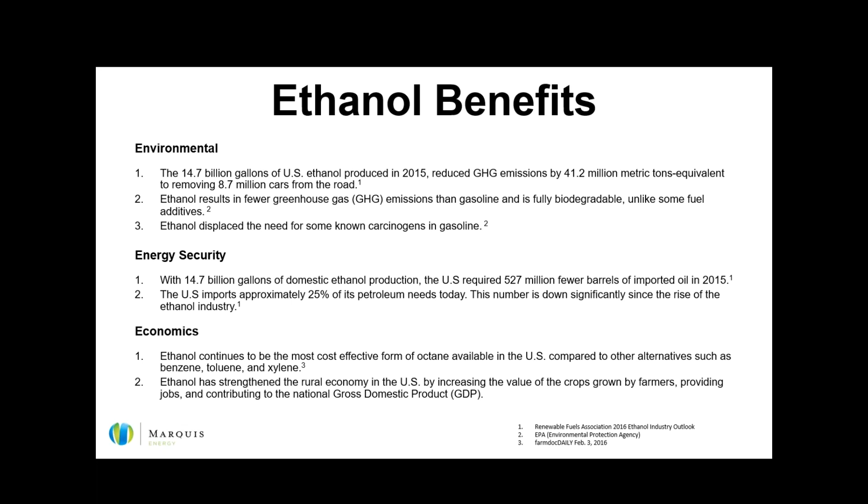You look at some of the opportunities in export markets and growing world demand. Right now we use about 10% ethanol in the United States. Brazil uses about 65%, and the rest of the world uses less than 2% in their fuel supply. We think there's good opportunity for growth there. It's a great story for the Midwest, for the ag economy, but also for our country and our world as a whole.

I mentioned that we had laid out a planned expansion back in 2006 to kind of double the size of our site.

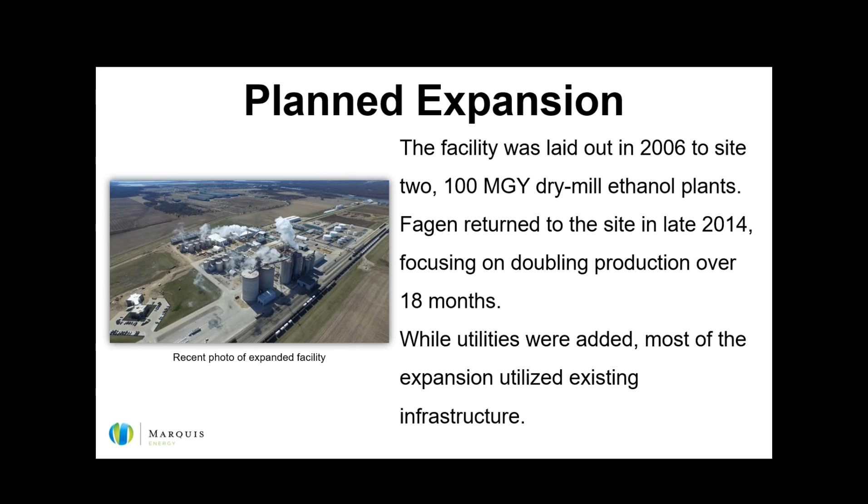Between our original facility that started production in April of 2008 and late 2014 when we brought Fagen in to work on the second south unit, we had increased production here at our original facility to over 155 million gallons per year. Currently both facilities are running well over nameplate capacity, and that's in large part due to our culture of continuous improvement, but I would also say our opportunity to reinvest into our facility.

A little bit about how we got to the decision to look at PCS7. When we were built originally in 2006 and 2007, we had installed a Siemens APACS DCS. By and large, I'd say we were very happy with the performance of that relative to some of the other systems utilized within the industry sector and the ethanol space. But I think as we considered that it was headed for legacy status, now was kind of a logical time, as we worked on this expansion, to upgrade our original DCS system - it really started to make sense.

There are a few pros and cons for the APACS system, but overall we thought the system was good. We enjoyed the functionality of the system - it had been very reliable for us. But I think we didn't want to get to a point where we had one system running on something new and modern and the latest and greatest, and a separate unit, located 150 yards apart, that was on a more dated system.

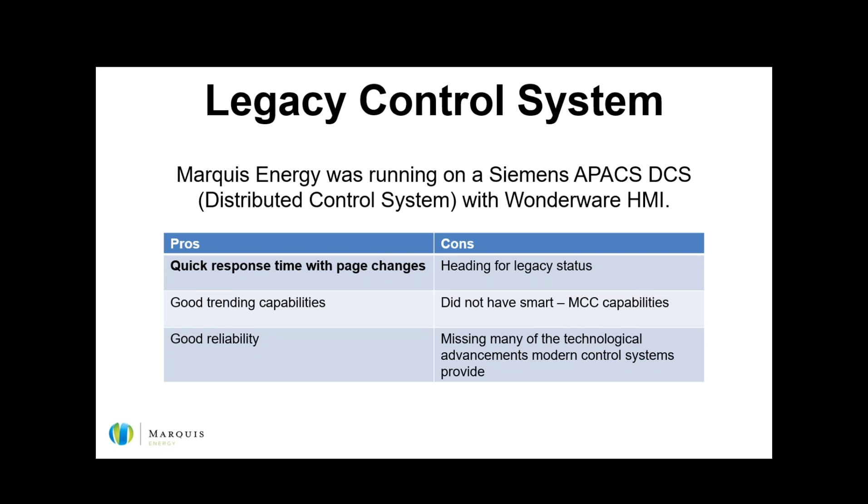So we decided to go forward with reviewing different systems we could utilize. I'll mention just a few of them - the Emerson Delta V was something we gave a lot of consideration to, Rockwell's got a system, and we considered implementing APACS over on our new build and new construction. I think we kind of wanted to get away from that - it didn't seem to make a lot of sense to implement new construction with an outdated system, or a system headed for legacy status at least. So the alternative for Siemens was PCS7.

Again, I think it came down to the decision of, do we have one plant running APACS and 150 yards away we're running Siemens PCS7? I don't think we thought that made sense. We felt like if there's ever a time to make the change, it's probably now. So Fagen got mobilized back out here in October of '14, and we made the change to our DCS on the existing North unit in August of 2015. Our operations team was able to get comfortable at a facility that was already operating, that we understood well, and it really helped our transition when we started up the South unit, having been running PCS7 on the North unit for a few months.

I mentioned we went with PCS7. We felt like the biggest driver there was the familiarity with the players. Our rep there, David Meyer at Siemens, represented us really well. We felt like he was a good communicator, and despite the fact that Siemens is a big company, we felt like we had good communication, and David got us access to the right people. So I think that was a big part of it.

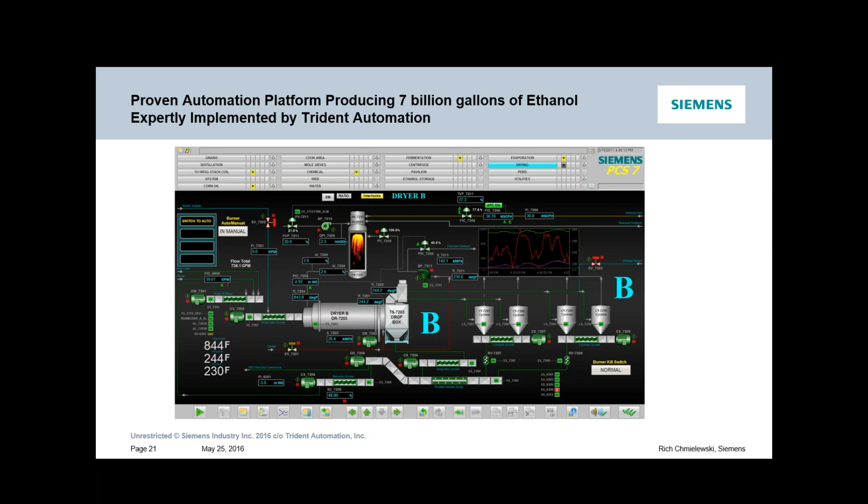We're going to continue through and talk about the benefits of Trident. Trident Automation is an independent professional services company specializing in process control technology solutions that deliver increased productivity, high reliability, and measurable cost savings. It's a big deal in the industry to be able to provide the services we do, and hopefully most of our customers are working with us because they want to, not because they have to.

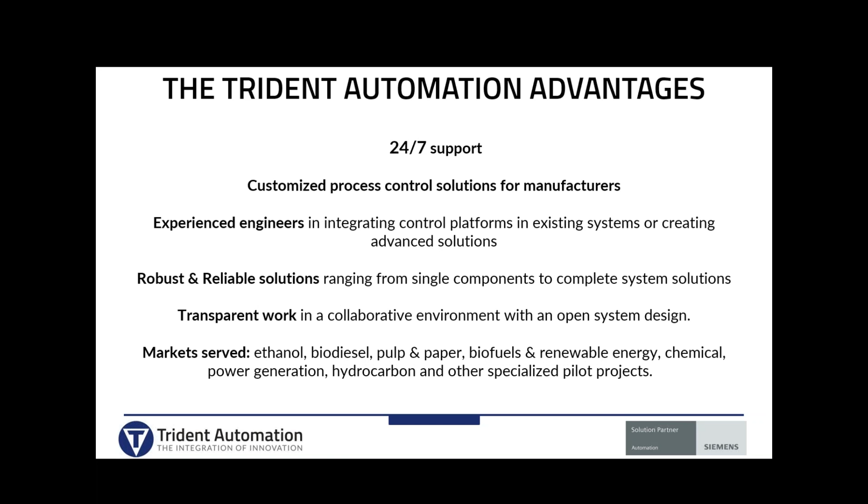So as far as the other experience, we offer a full range of products for ethanol, ranging from products like CivPac, which we developed in 2008 to better help with the control of the molecular sieves. We have a lab system that we put in 2009, followed by KPI, a key performance indication system, which was developed in 2011.

After that, we developed a Workbench suite, which allowed you to have a graphical web-based user interface to the lab, KPI, and DCS information at your desktop, as well as remote devices like tablets and cell phones, if you had VPN access.

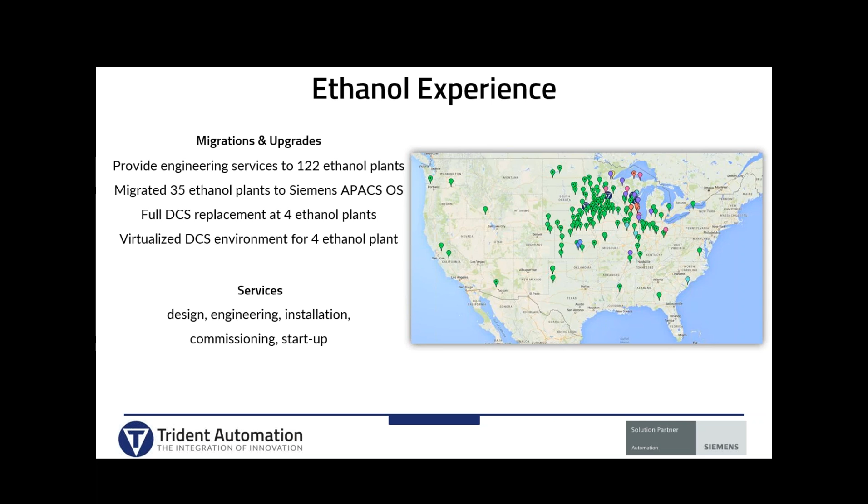So we were very excited to have Marquis Energy approach Trident and invite us to bid. We felt like we could provide a great solution for them. Like Jason had mentioned earlier, we've been working with them since their inception, and we're very excited to get into this and offer them some solutions.

So the following slides will basically go through and explain what we presented to Marquis and what options we offered in the quoting and the solution/results page, to end up there.

So as with any job, there's definitely requirements, and Jason alluded to some of those earlier. We had some time constraint issues right up front. They wanted to have this accomplished in their standard turnaround, which we felt we could meet. This isn't our first rip and replace. We've been doing this for quite a long time, and we have a pretty good track record of being able to meet the customer's timelines.

We did work with our customers' needs. We had the requirement of a virtualized system in there. Secure access to the DCS was a big plus for them, and there were some improvements we wanted to make around the other interfaces they had, to either Rockwell or ABB, any foreign device interfaces. It was important to the customers that we use standards, like the APL standard, Advanced Process Library.

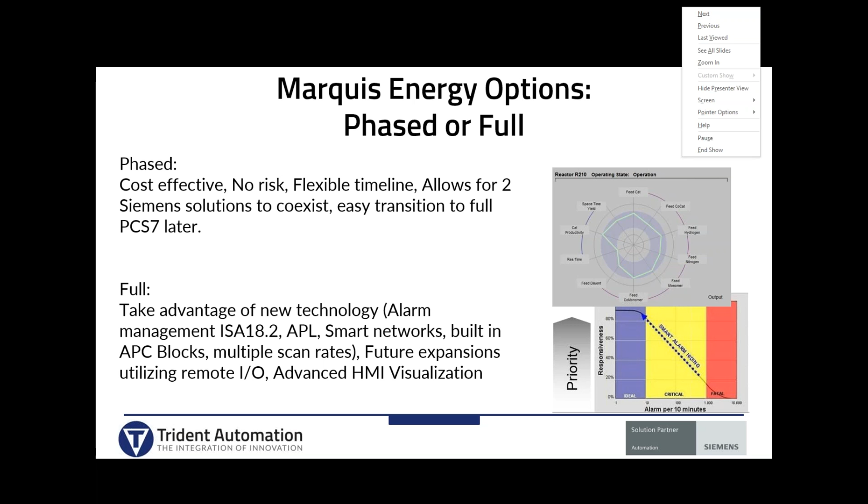Some of the challenges you have here are legacy PCs, where you have just old technology. Anything revolving around Microsoft PCs, they tend to flip those out so fast that your DCS seems to fall behind a lot quicker than it used to in the past, which leads to your legacy operating systems. In the case of Marquis, we were kind of stuck at Windows 2003 server, partially because the IO server, and because that's what the platform ran on.

Another drawback they had with the Wonderware is it's a third-party HMI, which means it needs an IO server to talk to it, so it doesn't natively talk to the control system. You have to have a little device in the middle there. I already mentioned this one, the no support past Windows 2003. And the biggest one, I think, is the security concerns.

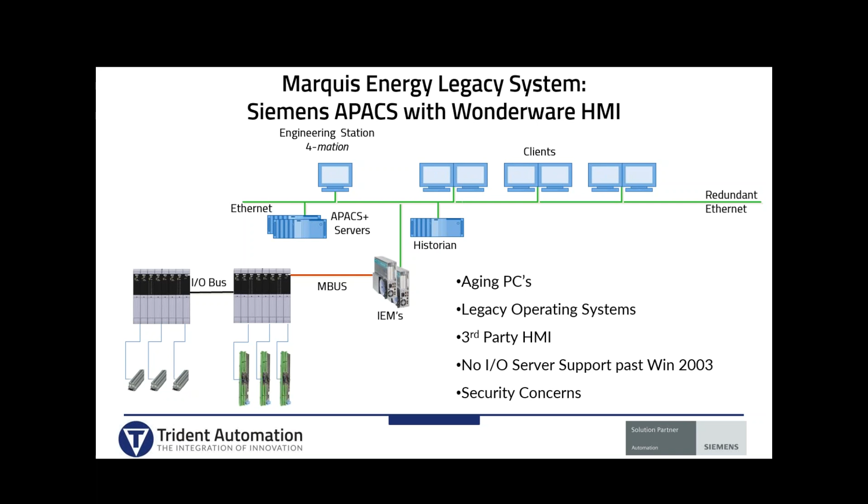So what happens here is you've got a legacy operating system running, and more people want access to their data, which, through cell phones, tablets, or whatever, VPN access, this becomes a big concern with legacy operating systems. It's really easy to get viruses pushed onto these.

So in the phase approach here, what we did is we looked at basically just looking at the HMI and the PCs portion here. We essentially remove that, come in with new, offer extended screen capabilities, if you will, quad displays, faster servers. We can support the newer operating systems here. Siemens software now is sitting on top of Siemens hardware, which is really key - it's just a straight API command here, where you don't have to have a third-party IO server.

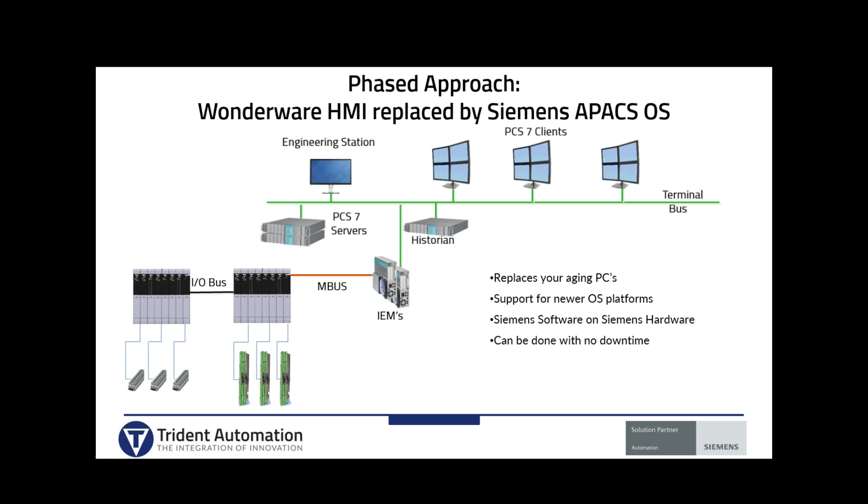A really big one here as far as downtime goes, there's no downtime. We've done 35 of these style upgrades with zero downtime. This is also the first step in the phase approach, which means just HMI replacement followed by a hardware change at a later date, at the comfort of the customer. And the systems can run concurrent.

So what this really means to the plant is they can basically have their operators have the old system sitting right next to the new, and if, kind of a security blanket type of issue, or if they really feel uncomfortable with the new graphics, they can flip over to the old until they're more comfortable, then we can come out and pull out the old system. So they can run concurrent, which is a big plus.

And as always with everything nowadays, you have a virtualized option in this solution as well.

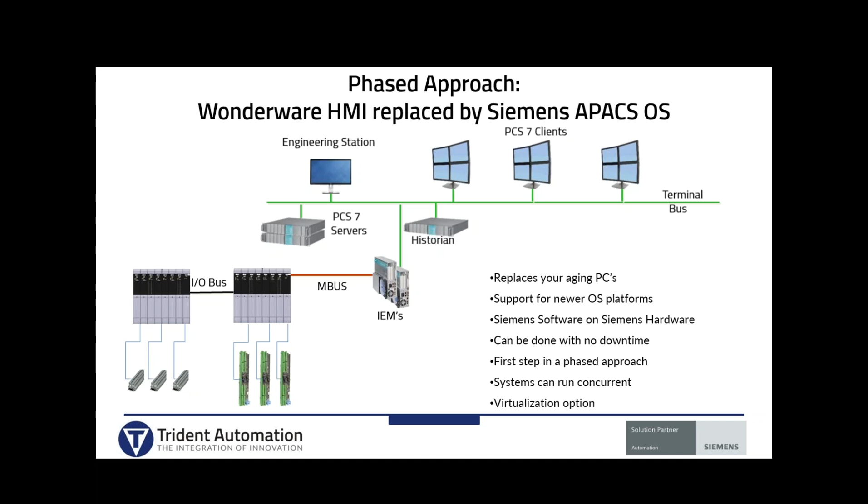So the next phase would basically be to replace your hardware, which I've circled here. This step is usually a little more intrusive to the plant. This is where you're going to probably start to encounter a little more downtime. You can't lift wires without getting into some downtime.

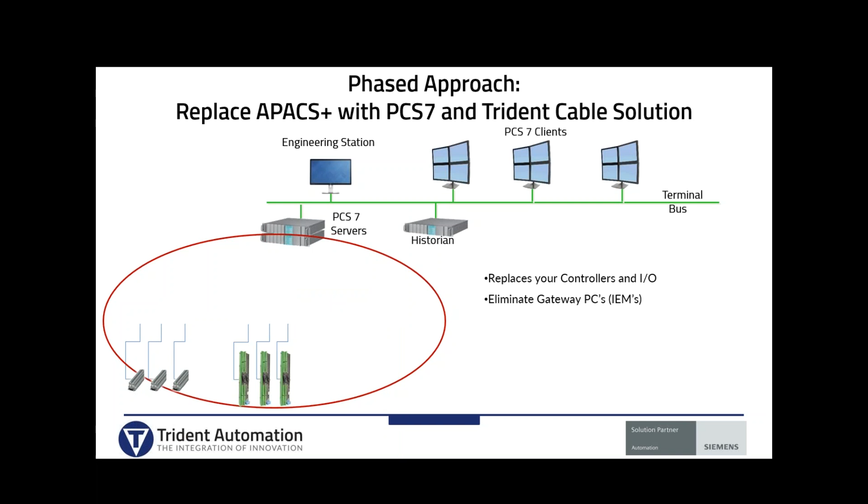So we pull out the APACs, the IEM, the controllers. We basically put in a new control system, which is the PCS7 that you see there, new I/O. You'll see here that we have the HART capability now. We've left the discrete I/O alone with our cabling solution, which basically means really reduced I/O checkout time. We've introduced HART Smart capabilities now that Siemens provides on their I/O. Didn't have that with the APAC system.

And now you've got the ability to start using Profibus devices, PA, DP/PA links. You can get into smart motors. There's some other things in there. Remote I/O is a really big proponent of going with the Siemens PCS7 solution. So now instead of having junction boxes everywhere, you can basically land your I/O right out at the instrument.

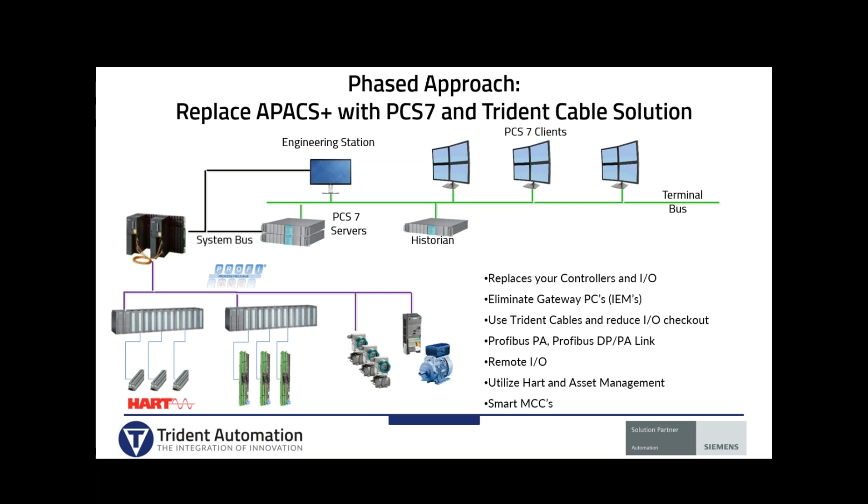And you can bring asset management in now with the HART capabilities, providing some asset management software on the engineering station and the servers. And like I said earlier, Smart MCC, which I know was a requirement of Marquis because they're doing it in a new plant and they want to have the capability of doing that in the existing plants as well. So they now have that offering.

This slide shows the phased approach has some other advantages. You could, if you didn't want to spend the money, keep your old system in place and do all your expansion through PCS7, giving you a common HMI interface between the two systems. That's one of the advantages of staying with Siemens: you don't have to remove your old assets. You can keep them—they're a robust hardware platform that still functions and provides control. It's actually pretty easy to train. This is a very flexible offering.

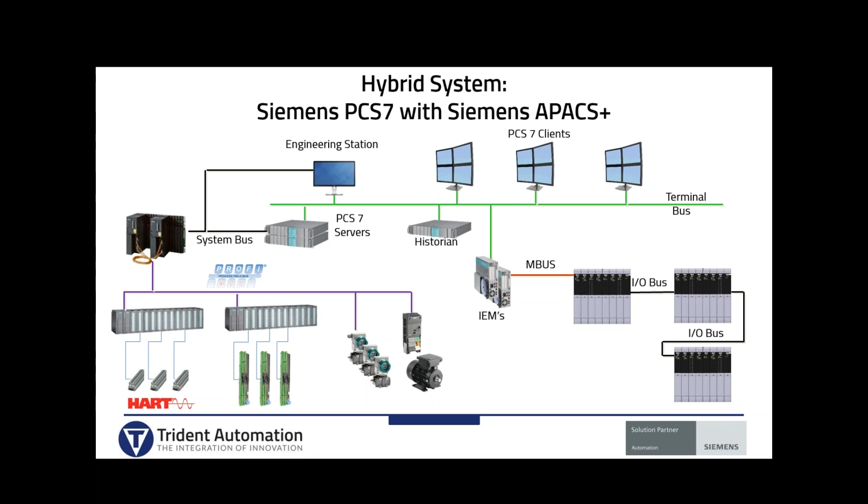Keeping costs in mind, this is obviously a big deal for pretty much every customer I've worked with—you definitely want to try to reduce costs if you can. Leveraging Trident's experience is probably the biggest cost reducer out there. We have experience in this industry; we know what we're doing. We can help you, based on past experience, get things done. We can identify what you as the customer might need to do, and draw on past experiences to reduce the timeline, work with you to get things set up on time, and give you options on a phase 1, phase 2, or a full rip-and-replace solution.

Risk analysis is a big part of the cost savings. If we can identify your risks and work with you, we can help mitigate things and speed them up if we know where the risk lies. Phase 1, which we call the on-the-fly install, has very little risk because everything's already redundant in the system—we can flip everything out on the fly. The only real risk is there are reboots required, but as far as the controllers go, nothing is touched there, so there's no risk. Installing a new piece also has redundancy, so no risk.

In the second phase, though, there is some risk. We do have to unterminate the analog wiring, but the discrete is held onto with a cable solution, so there's no new loop check we have to do.